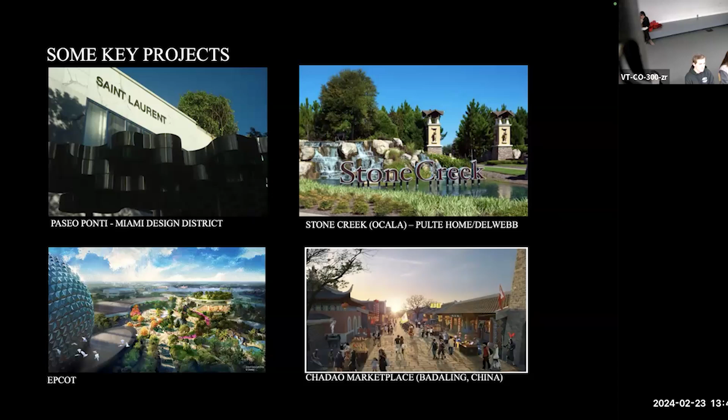All right, so let's do an exercise. I know one person doesn't have her notebook - oh, sorry, I stand corrected, she has her notebook now and a pen. So please take that out and get a blank sheet of paper. And Jen, you were a volunteer. Oh, in Korea, we do this. I need your help.

So we're doing number one. Take out a sheet of paper, take out something to write with. I hope you guys all have something other than blood to write down something. Oh, I need to use my... And I need the volunteer - you were volunteered by the fourth year construction document class. It was you, you were young.

Volunteer will describe the shapes that I'm going to give her. She's not going to show you, she's going to describe the shapes. You can only describe the shapes using terms like large, small, medium, and the placement of it. So you can't say like...

Circle or anything - the shapes and its location on the sheet of paper. The closest to the original will win a prize. I don't have a prize. I don't know, yeah, we can think of something. I mean, I'll take you guys out to dinner, whatever - college students need dinner. Okay, so get your pencil ready.

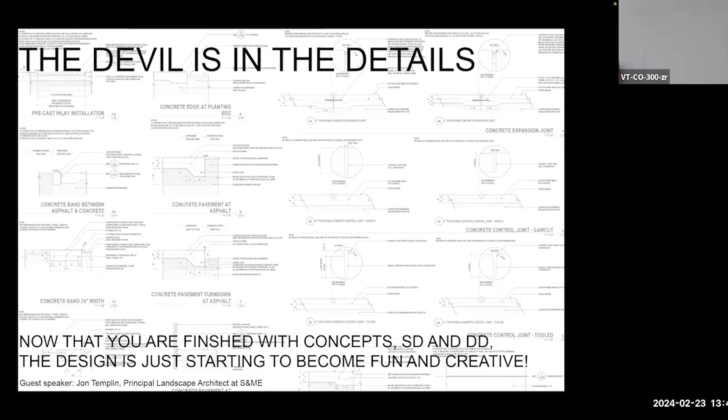Now that you're finished with concepts, SD and DD, the design is just starting to become fun and creative. I just want you guys to understand that everybody may want to do conceptual schematic design, construction detail design, construction administration, field work.

Nobody says project managing, writing proposals, or anything. Who likes to do conceptual schematic design? There's no wrong answer. Anybody like doing construction details? Okay, so our goal is to have you guys enjoy this process, because to me, I think

it's the most creative part of the process. And then construction administration is taking this and making sure it gets built. That's on you guys, to make sure that it is exactly what you guys envision through your construction documents, right?

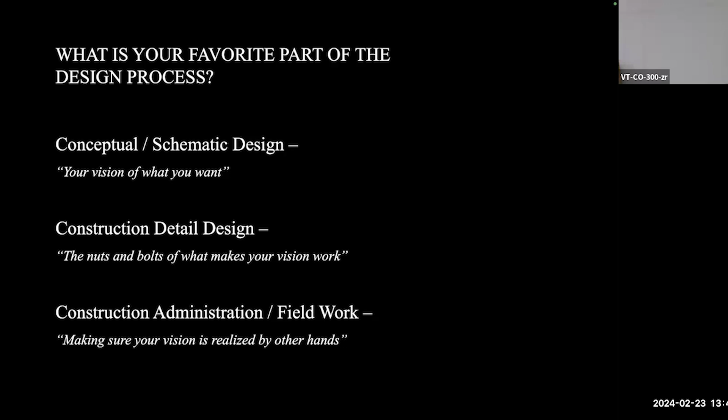So you guys may laugh at some of these. I didn't pull these, I recycled, but you'd be surprised how often this stuff does happen. It could be a matter of just a base being off. It could be a layer being frozen. It could be you got an updated base, but you didn't update it. It can be so many different things where you get that kind of stuff.

Now, they should usually be filtered out through the RFI, request for information, process by the contractor so they can get an answer. Personally, I don't even like getting RFIs. You're going to get them, but I just don't like getting RFIs. I feel like RFIs mean that something is missing in my construction documents.

I hope through this process we will nail everything that you need to know, so that if you do get one, it's not the end of the world. It's a real basic one, like, oh, it's in two plans and it's really four plans. Something very simple. But design-wise, I would really like for you guys to hopefully get out of this

this process that I'm going to teach you today—if you learn this, I think you guys will be a step ahead of a lot of other people. I have people at my office now that have 10 years, and I'm explaining this to someone with 1 to 3 years, and they come in and go, 'Wow, I didn't know that.'

And I said, well, I looked at your documents. I know you, I've seen your documents. I know. So let's get into this.

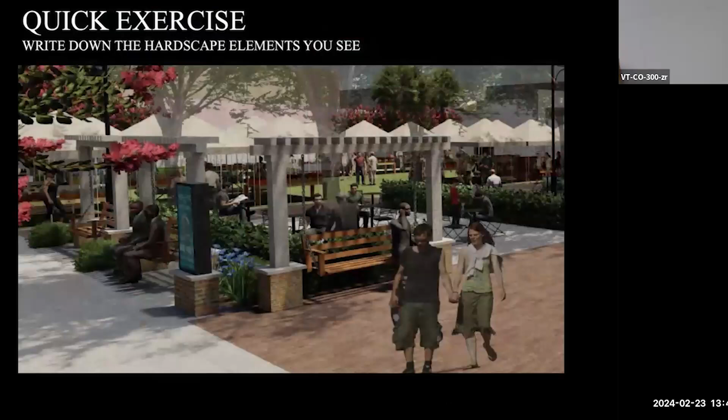So on this sheet of paper, this is a design from a previous firm. You kind of see a plaza here. Just write down a few things that you might see design-wise. I don't care about the landscape, hardscape-wise, what do you see?

Okay, someone want to volunteer? What do you see? Seating. Okay, what kind of seating? Bench seating. Okay, bench seating. All right, sure. What else do you guys see? Paving. Okay, what else?

Turf. I don't know if it's artificial turf or sod or seed or whatever it is. There's a big open space right there for events.

What else do you see? Some type of trellis feature with a column, and that column is repeated onto a digital kiosk. There's a bench there, crushed granite here, so I probably need an edge for crushed granite. There seems to be a sidewalk. I don't know what finish it is, but it looks like there could be a band next to it and some seating up.

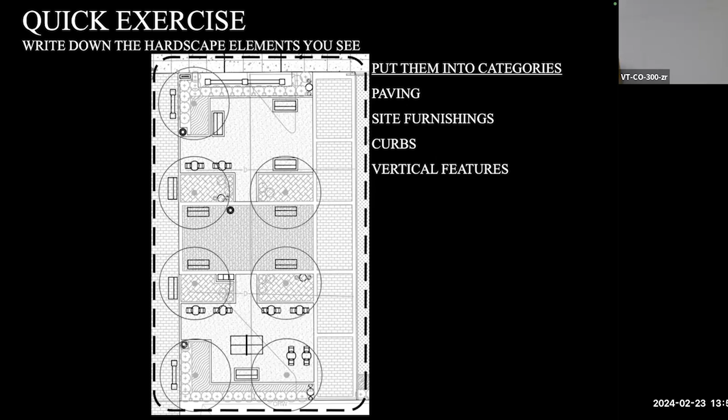So when you're making your list, and hopefully when you guys are drawing this or putting it into CAD, you should be thinking about what you're drawing. They're not just lines. It's either a path, it's a landscape bed, it's something you're being asked to draw from the conceptual master plan, whether you drew it or not. Sometimes you don't get to draw it, but hopefully you do. You should be inventorying everything while you're doing that, because you're going to know best, or you're going to question the person who drew it if it didn't work. That happens quite frequently - it's a scribble, and then when you put it in CAD, it never works. You guys make it work, and that's part of the design process.

So paving types: concrete pavers, clay brick, concrete, crushed aggregate, bench, bike rack, trash receptacle. These are all what would go on my site furnishings list, or any kind of thing that needs a model number or is bought from a catalog. So you guys should go through the SD process and figure out what kind of concrete pavers, what kind of bike rack do they want. You do that during the SD process, right? So it's a bunch of images possibly.

And sketches if you want to figure out something, maybe some details, hand drawn if you can. I try not to go into CAD during SD if I can. I might do the plan in SD in CAD, but for the most part, you're just trying to get the answers as you're moving on.

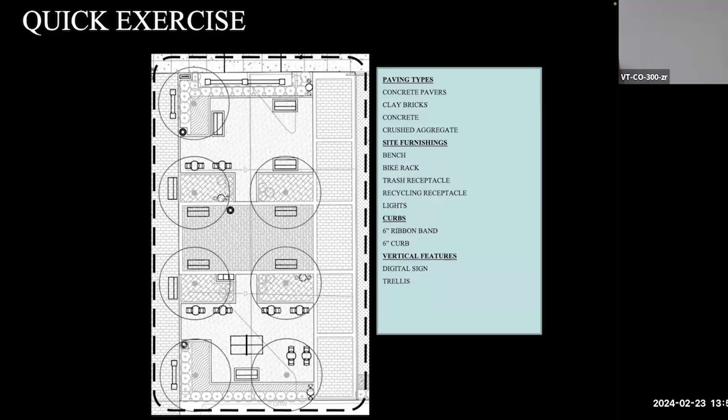So now I start the cartoon set. I got all this stuff here, and now I try to figure out where that goes in my construction document set. Now I call it the cartoon set - people call it storyboarding, you can call it anything you want. I'm just used to it being called cartoon because it's really sketchy and loose.

So at that time, during your concept to SD phase, you're figuring out and sketching out - I can't describe how much sketching, guys, like rough sketch is fine. Just understand your spaces and the relationships between other things. So, you know, it's 7 foot tall, this is chest height, so maybe 4 feet. I'm gonna do stone - Hokie stone, you know, how's that Hokie stone?

Is that on a poured in place wall? Is that on a CMU wall? I don't know, I'm trying to figure that all out. Is there a cap? All that stuff - figure out the relationship. Do these cool sketches, like I said, these are quick. As you're drawing, designing, you should be thinking about this in 3D. You don't need to go into SketchUp. Hopefully you're all 3-dimensional thinkers.

So now look at the plan and sketch a little bit more. So this happens right here, and now I got it in plan. Now I got what this detail is going to look like - still hand drawn, still understanding. It's just the next level.

So I may be at DD now because I'm one step away from getting into construction documents. So DD to me is probably about 30%. Different people do different things - oh, SD is 30%, DD is 60%.

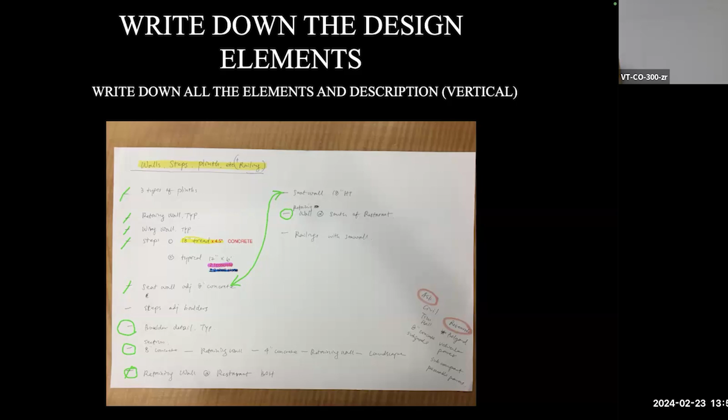Usually what you're going to do is on your finish schedule, you'll have paving types like PO1, PO2, PO3 — the more you know now, the less you have to change later. The problem is when you don't think it out, you've got all your sheets set up and it's like, oh shoot, I forgot this paving. Now all my details are messed up. It's like, oh crap.

Figure out where you need more detail. So I usually go in here and double check myself — I have a section here, a section there. Where are all my sections? Do I have sections that are already in the detail library, or not? If you do, that's great, that's a start, but it's never finished. You should read over it, change what you need to, save it out, and never alter the original.

Get in there and get your inventory of what you have and what you might need to create. So I've gone in here on this plan and said, okay, this section is going to go there. Now I have this many different types of steps — I have a section of every kind of step possible. I have wing walls on the steps too.

So are those wing walls the same? Are they 6 inches above, or all at the same level? Do they have some kind of stone cladding on them, or just a concrete finish? I have no idea.

Figure out when to enlarge. I was telling the group beforehand, this is just for me to figure out the details, so I don't care about scale here — 100 scale, whatever. Once you guys start getting into your plans, they'll probably more likely be at 20 scale. Civil likes to work at 30 scale because they're cheap.

They don't want to use a lot of paper, and they don't like to write, they don't have blow-ups. So if you ever look at a set of civil drawings, you'll think it's horrible compared to what I do. But now you have this — there's a bunch of information here. I'm at 20 scale, now I've got to blow it up, I'm going to 10 scale. Okay.

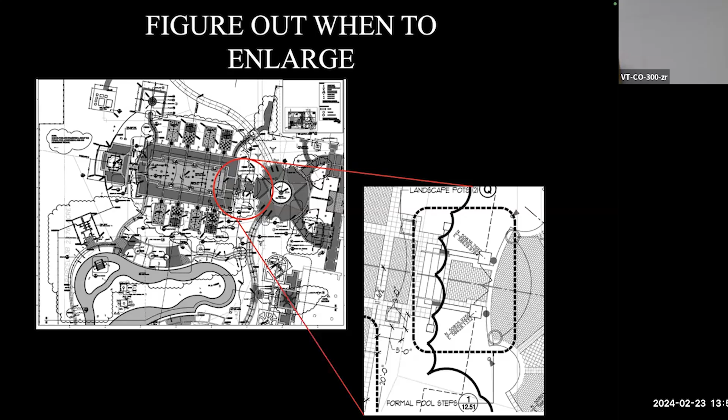This is where you might get into SketchUp. So what are these columns? I'm going to do a camera view here looking down at the pool. Is that column too big? Is the column too small? Is it blocking my view? That's when you start getting into 3D sketching or whatever programs you want to use.

So what I do is, this is the inventory of what I had beforehand. I grab that list that I made in taking notes, and then I go ahead and use Post-it notes. I usually use whatever Post-it note I can find. I try not to use the 1x2s, they're too small, but I'll do a 3x3 or whatever. I start sketching what that detail is and calling what it is and what I need to get out of that detail. You can have text in here, like I need a precast cap.

So now I'm going to take another Post-it note and draw my precast cap. I know I need a precast cap that's this long, this wide, this thick, all that stuff. That's when you get into this. So now I'm covering every single one of those details I just wrote down. I guarantee each one of those details probably has 3 details associated with it, whether it's plan, section, or a cap.

I don't get into footers, but you're going to call out maybe if you have a stone finish, you're going to say, okay, that has a stone finish. So that goes back to the finish schedule. What stone is that? Oh, I wrote it down. I got Hokie stone.

Any questions, guys? There's a lot of stuff being thrown at you. What do you do to refine your list, like you said you could have extra? Yeah, I take a marker, I say, oh crap, and I just write it down. It's loose, and then I make another one of these and I'm done.

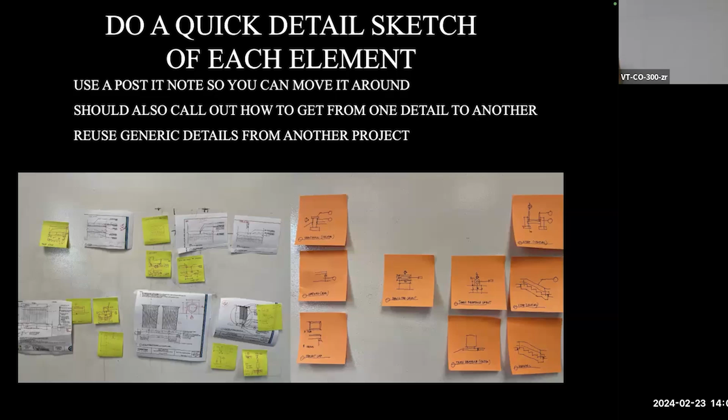This time I'm helping you. So I'd probably say I can spit one out in 4 hours. I can know the whole project in 4 hours. Maybe depending if the coffee shop's busy, whatever, it could take me a day. But I go to a coffee shop, put some headphones in, have it all laid out, and enjoy it, man. It's a fun process.

You'd be surprised how much you learn during that. Now I take those things and I start laying out how do I get to plan and detail to detail.

So I'm at 20 scale on my plan views, and I'm going to 10 scale. First thing I do is I have all my enlargements after my 20 scale plans. I'm going big to small, so 20 to 10.

So you may have a sheet full of tons of 10 scale blowups. You have to make a decision. I've had projects where I've been like, holy crap, I'm 10 scaling everything, why don't I just do 10 scale? And that's fine, it may make more sense and be easier to read, as opposed to having callouts for 10 scale when there's only a teeny spot that's 20 scale.

So I'm in here now, and you should be doing this during that process too. So how do I get there? What is this? Plinth 3, holy cow, I had 5 plinths. My old boss liked plinths, I don't know.

So, on concrete, on 8-inch concrete. So now I go here, and then where's that plinth? Plinth 3 is here. This is how it is.

These things take me, if you're spending more than 5 minutes, then you're spending way too much time. You're gonna be at the coffee shop all night, which is not bad, I'm just saying your boss might not like that. But 3 minutes, 2 minutes, 3 minutes.

Once you start getting used to this and you start understanding, that's why I'm saying this process is fun. It challenges you. Spit them out.

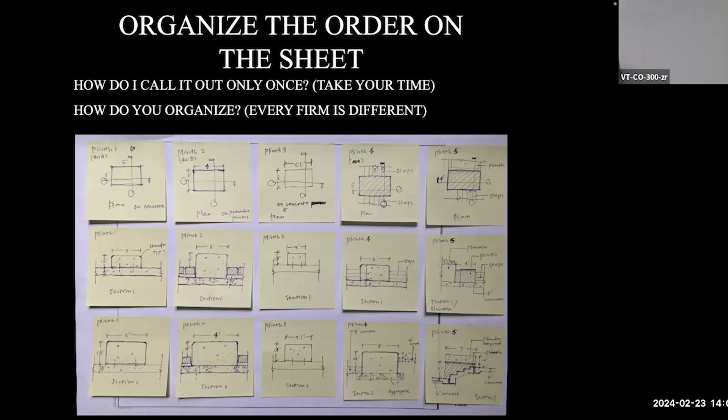People like 22 by 34 because it's true 11 by 17 - yeah, I think I'm right? Yes, so that's a trend. So just write in there, true half size, 11 by 17, blah blah blah.

But this is when you guys can start moving stuff around. And I'm not saying you'll never have extra details, I'm just saying this is a great time to do it, because I have 7 sheets of this with all my post-it notes.

Now if I decide, hey, I don't want to cram or move around another one, there's nothing wrong with having an extra sheet with a couple plinths on there. No big deal.

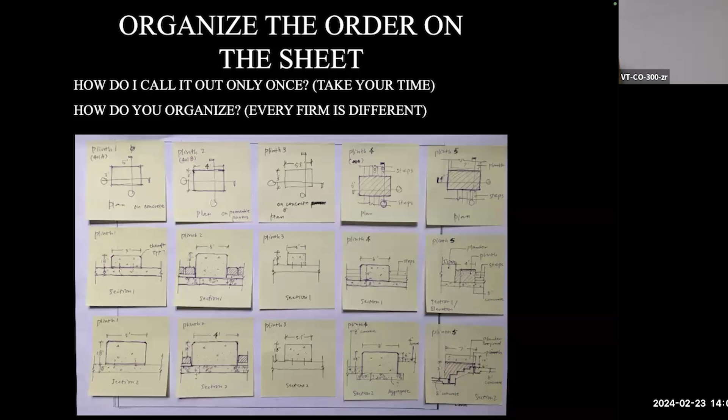Okay, so how to label once. Now I talked about this in some of the classes I was in earlier. So to me, the goal is that on plan sheets, you should label everything once on each plan sheet. And if you have more than one, you could say typical of this many of them, right?

So you're trying to make your construction documents not muddy. I hate it when I've had people put their tags right on the design element. Get a leader out there, get it away from it so it can breathe, right? So I can see it.

So here's my finished schedule, right? I got my 20 scale plan, I got my enlargements, and I got my details that I just put on my post-it notes. Now I'm at this point, so I need to go from 20 - this little callout gets me to this. And now you have to decide, how do I go somewhere else?

And when you go somewhere else, I like to say that you go in a big circle. So somewhere, I'm gonna have to get back to the plan, right?

You can't read this, but it says, see hardscape plan for locations, finishes, and so on. So this will get me back to the plan, I know it's certain. Don't end it, just get them back to the plan somehow, because you're not going to tell them every location where that happens. Go back to the plan, see where it is, it's there, that looks like paving right there. I got it called out on this side, and I say poly, comma, typical. It's a hatch pattern. So this guy gets me to here, I have a section that gets me to here, this gets me, I think that's a rectangular box that gets me back to that.

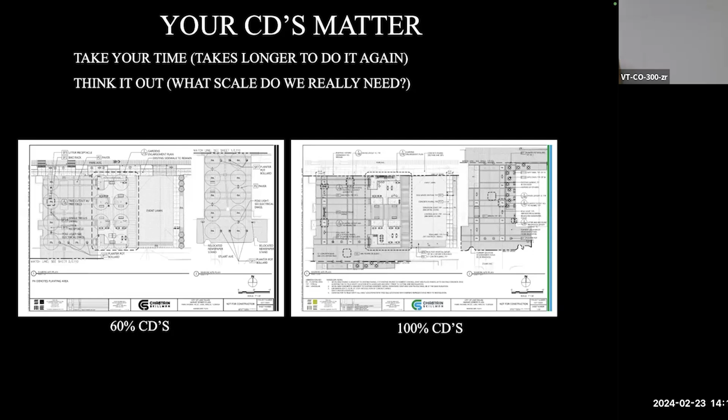So yes, straight lines, I've tried to do straight if I can. If I do an angle, I do it at the same angle. It's not that difficult, do it at the same angle, it looks really good. Easier to read, it just opens up the design a little bit more. Line weights are different, so, okay.

This is what I got. I got details on my plan, have details on the detail sheets. You know what I mean? Like, what the heck, this just looks a lot easier to read. I got them split on either side. I might have to go in the middle sometimes because I don't want to cover up the design. But in general, this looks better than that. If you disagree, then I don't know what to tell you.

You can disagree, that's fine. But get your details on a separate detail sheet. So these are random. It's like, okay, I got an expansion joint, I got a control joint, I got a ribbon curb, I got a thicker ribbon curb. Why aren't they on a set of detail sheets?

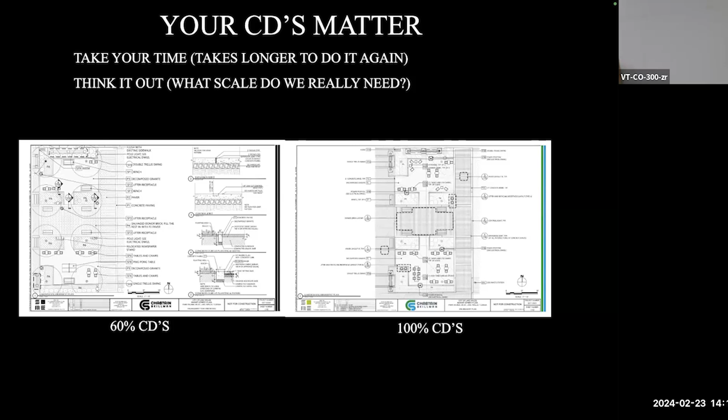This is still part of that 60%. So I'm pulling my hair out. I just got some gray, just no thought. Now we used a manufacturer and they were going to sign and seal the drawings.

So we did design development. Trend these days seems to be that we're going to take it to a design development level, and then we're going to throw it on the contractor.

I try not to do that personally. I like to figure it out and then give the contractor as much information. You can still submit shop drawings to me to be approved by owner's representative, but I'd like to have more control of the design. They did all the design - this is a buddy of mine, he owns a company - but still, I want to have that control.

This is mine, so I have my blow ups. There's two different ways to think about it. Back in the day, we would do high to low and then finish schedule at the end. After I came back from Korea, we started putting finish schedule in the front, and then we would go low and bunch common features together, like the trellis would all be together on a sheet. But I would probably go low.

These are the details that are typically the brainless ones, because I'll just grab those and read over it. Maybe they change a little bit, but essentially these details, that sheet should be done. So I could concentrate on this detail right here - this is the fun one, and whatever. But these usually do need a little bit of work, for the most part the company you go to will probably have these details.

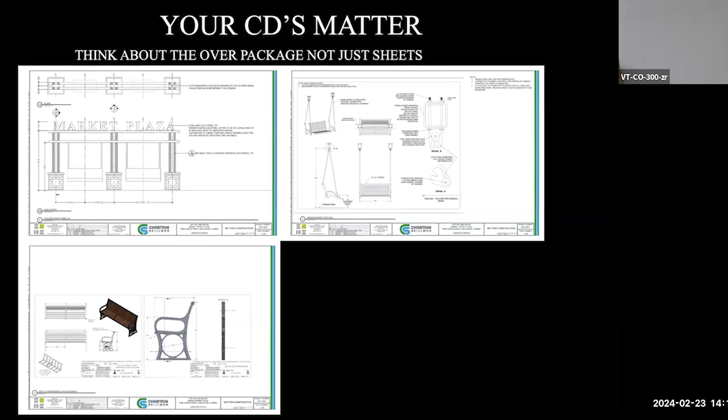Labeling is an art, right? I've kind of already talked about that. Line weights are an art too.

I'll screen back everything. It depends on who you're working with. So if civil is in-house, like GAI has civil in-house, I never touch their base. You never touch anybody's base. But if I have civil as a third-party consultant, I destroy their base.

But you have to know how you destroy it and how you replace it when you get an update. If you start exploding things, just realize I have a very intense process to do that - saving layer states, exporting layer states, bringing in layer states, all that stuff. I'll teach anybody, maybe next time. It's a lengthy process, but I'm guaranteed to have all the line weights and line types there. I usually slam civil down to 50%, might even go 30%, depends.

And then I've been working on these - I have labels for 10 scale, 20 scale. I have a template for all this stuff.

Oh, do not put - this is a pet peeve of mine - nothing goes in paper space. If you put anything in paper space, my brain will explode. The only thing that goes in paper space is the title block and anything associated with it if you need it. Everything else will be in model space.

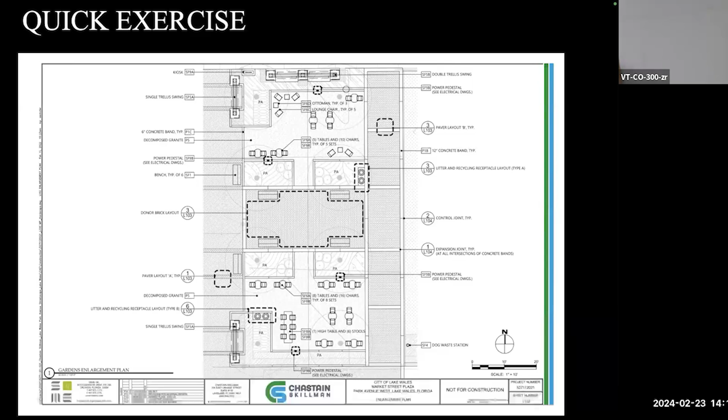So that goes back to text on the right, dimensions on the left, and at the bottom. This here needs its own detail, or you're going to start clouding this detail up too much.

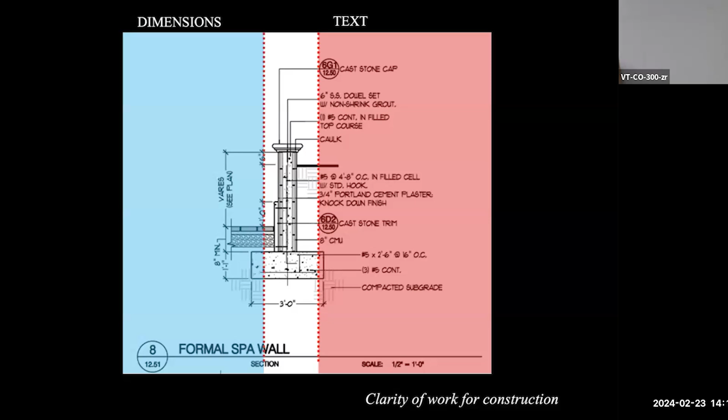Commit to the very end, stay true to your design. This is a project back in the day at Glatting Jackson. I worked on this a little bit - the details for it. That's it built.

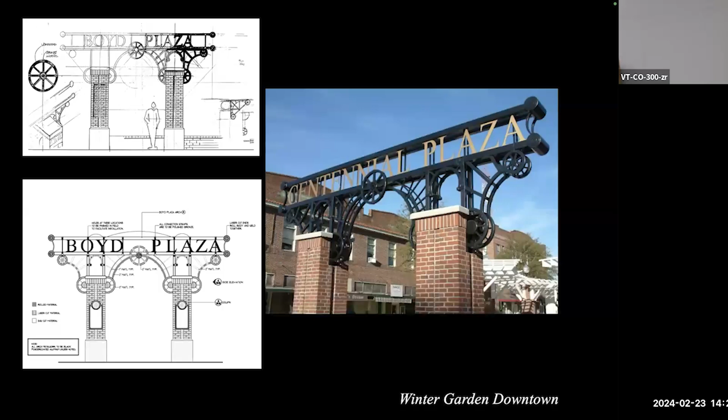Same thing - I think this is a place called Winter Garden, outside of Orlando. I don't remember, but I think so. And I think that's it. Any questions?

No? Terry, any questions? I think people's brains just exploded. Sorry. Well, I'm actually really curious, and I'm asking this of students at this point - how do you think this is important to what you're working on right now?

I think understanding what you're implementing and how it's actually implemented will change how you design. That's part of it for sure.

I'm really speaking about how the layout of your construction documents is really a blueprint, like baking a cake almost. You know what I mean? Things are in a specific order, however you put them in, or however some people go to the extreme where they say irrigation should be the first sheets in your set. Typically it's my last sheet because it's going to go in first, whatever. You don't have to get to that extreme, but it's the process of how you group things together and think about each detail and how it works, which is exciting to me. And I guarantee detailing will get your designs a lot better.

Anybody else want to answer Terry's question? Like at any stage of the design process that you showed - the sticky notes and the quick drawings - as it relates to construction documents, but also concepting and initial detail planning, whatever, at any stage.

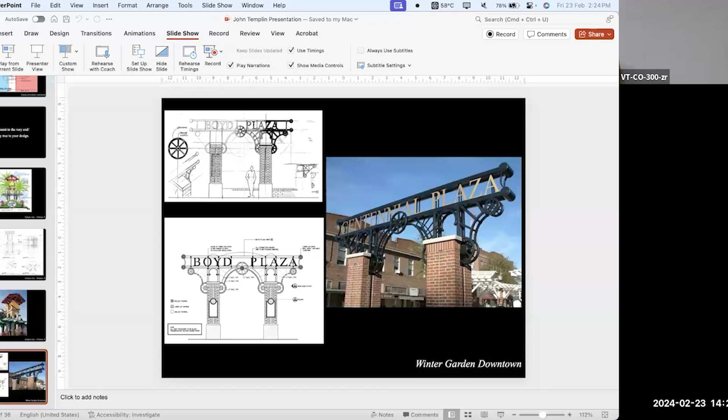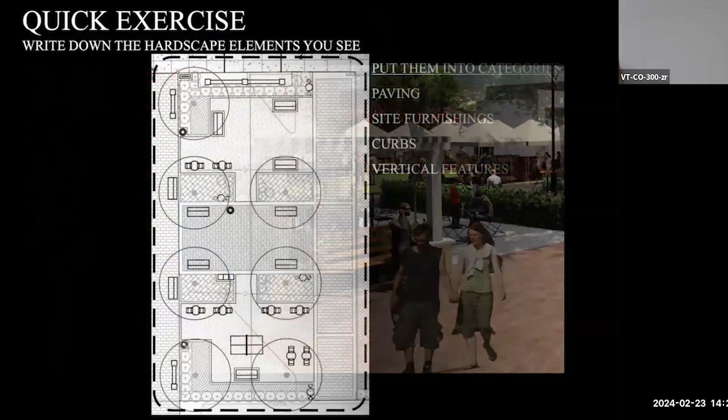So I'll offer this out to the rest of you. The seniors are doing their substantial presentations Monday and Wednesday after break, and you saw their presentations last week—they had master plans with placeholders for the design of things, but very little actual design. The site design is an interesting part. Where your work is, I see on your desks a lot of the master plan, but where is it that you actually do the site design that lets you create these design details? There's a step in between that you really have to get to.

So those are back one. Those drawings right there are what we're not seeing in a lot of the fifth year work right now, which is necessary for what they need to present in just two weeks. This is the fun stuff—you have to know your details, understand the space you're creating and the relationships. But ask anybody, they want to draw this, they want to put this big crab there, that's what they want to do.

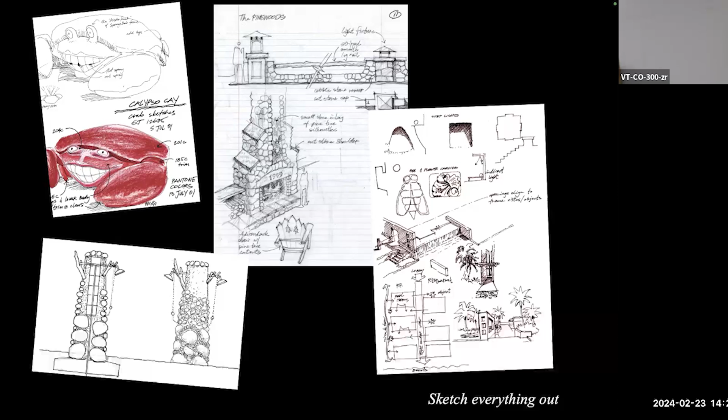That's the creative part—if you ever want to get a theme design, that's what creative is. I don't know if you have to go to this extreme, but this is very helpful in the process, like little vignettes showing where this is happening, a little sketch here to understand that space. We're creating spaces, right? We want people to be in our spaces—if the space doesn't work, no one will ever go. So you've got to get your materials right, get shade right, get relationships right. If it's uncomfortable, you should probably figure that out pretty quickly, and if you have to go to 3D, then go to 3D.

Your client wants to see this because you're selling a plan view to them—they want to see this. If you can do it by hand, that's great. If you have to do it in Revit or some kind of 3-dimensional program, that's fine too. But you still have to understand it to put it in there.

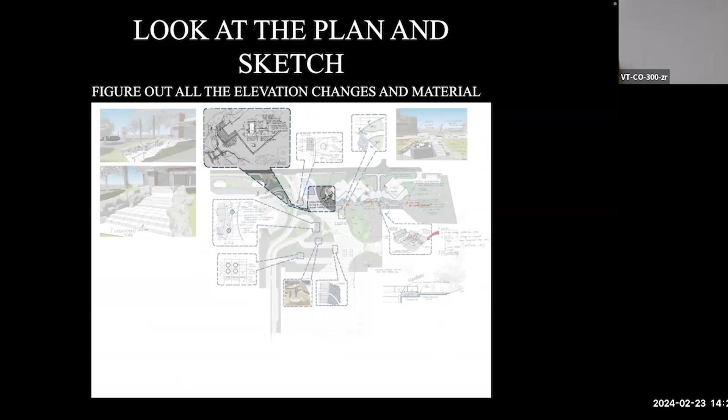But when you try something new or creative, then you need to check the feasibility of construction. In that case, how did you deal with that, especially when you're running out of time to meet the project deadline? Usually I'll have a structural engineer on board, because it depends on how you want to operate. I was just talking about this the other day.

I have not sent a hand sketch to a structural engineer and asked them to put rebar in it in a very long time. I will take this wall here, and if it needs to be doubled, I will start with that detail. I will take my best educated guess on the overlap, the rebar on center, the size of the rebar. I will take my best stab at it. I'll send it to my structural engineer, and now I just saved a lot of money because he's just marking it up, and then I'll make changes, send it back.

You are okay with that? Done. But I will start with the detail that has already—you probably have a detail that has structural stuff in it.

We've also done it where we throw it on the contractor to submit signed and sealed structural engineering drawings. If you're tight on a budget, you can throw it on the contractor. I don't like doing that because I like to figure that stuff out, but you probably have this somewhere in a library or from a different firm you came from. Or you could probably figure this one out.

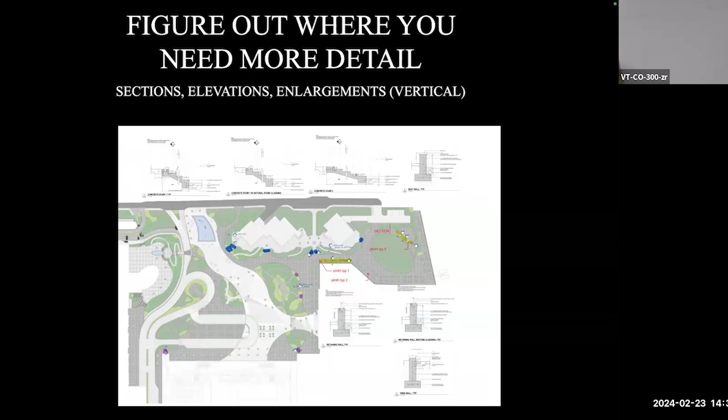I give them this, I control that. You just check it off, tell me it's good, send me an email—got it in writing, you're in trouble. Anybody else? Did you have something?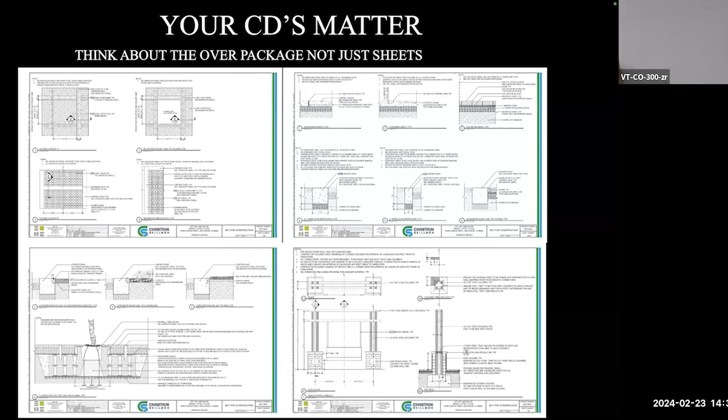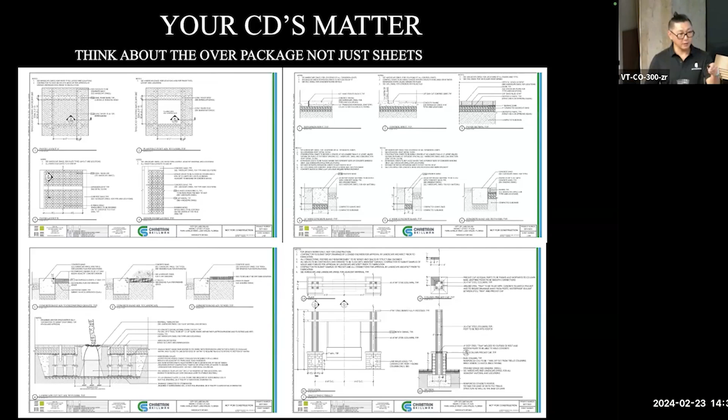When you're thinking about concepts in the design process, do you start detailing right away, as you're sketching? Oh yeah, 100%. If you get good, when you're drawing a line with a pen, you know what you're drawing. You'll draw it correctly and you'll know what you're drawing.

I had somebody come to me with a great portfolio, did a lot of conceptual work in China, master plans, 10 years experience. We were doing a new project down in Clearwater called Imagine Clearwater - you guys can look at that, it's awesome. She was putting some hand sketches into CAD, and it was all just like, what are you doing? The radiuses weren't whole numbers, circles weren't tangent. I could just look at it and go, what is this? And she's presenting and says, oh, I'll do it later, I just want to get something quick.

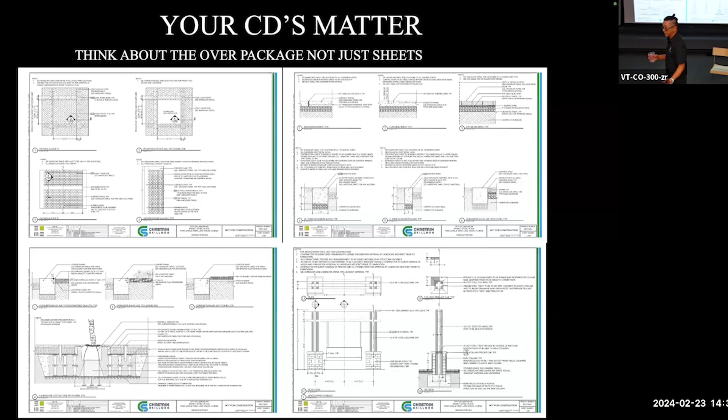Quick takes you no more time. You know what you're doing - it takes no more time to draw a correct thing than an incorrect thing. That's another rule: do it right the first time. It doesn't have to be perfect, but drafting-wise you should do it right the first time. I had a building just the other day - why didn't you put it 5 feet off the sidewalk? Why is it 4.42, an offset? That's do it right the first time.

Best case scenario is you have the concept plan, I pay you to put it in CAD, it gets approved by the client, and now I have to redraw it. I just paid you to draw it - why am I paying again? He loved it, but it's all wrong. So now what am I going to do? Double the time. Just draw it right the first time. Maybe they don't like it - it's okay, not a big deal.

But when you watch me draft, it's like a symphony. I just know what I'm doing, you know what I mean? You guys will get there one day. I used to always say, man, I wish I could just take that piece of your brain and put it into my head so I could draft like that. When you guys get there, you will understand, and you'll be like, dang, I get it now. Like I'm just pumping out CAD and it's all correct and it's just making sense. You guys will get there one day, it's awesome.

You want to get there, you want to. All right, I'm telling you, CAD's math. Can't tell you whatever triangle you were saying or whatever, but I can figure it out. What else, guys? I got a few more minutes or whatever - Terry's gonna kick me out soon.

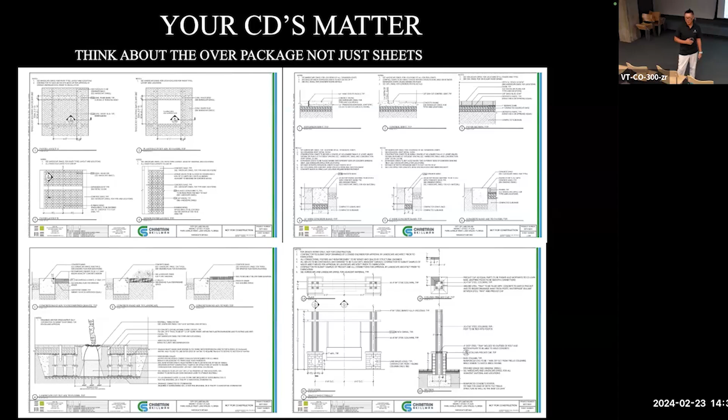Were there designs in Korea that weren't as popular in America that you brought back? So I was laid off in 2009. Experience is subjective - I graduated in 1999, so I feel like I have 25, 26 years experience, but only 20 on paper. It goes back to the passion. I'm walking around Korea going, man, there's no handrails or nothing - how do they get away with this stuff? Where's the Korean ADA? This is like 1970s style, fountains with over a 30-inch drop and no handrails. 5%, what is that? There's no handicapped people anymore in Korea - I mean, they're in the subway with no legs on a skateboard. There's really nobody.

But I think my biggest takeaway is that the Korean design and spaces were way cooler than I thought. It was kind of like designing for Legoland. If you ever design with Legoland, like I said before, you won't have a lot of control over that - I gave them designs, yeah. But what's cool about Legoland is that any design you give them or they come up with, this is their priority.

And I'm like, oh, that's cool. I never thought about that because I'm never thinking about my kid enjoying everything being kid-sized. You know, like that's their thing - hey, where's the kid door?

Korea's kind of that way to me - Korea was kind of just free in their design, like the Cheonggyecheon Canal is awesome. That was probably just finished right about the time I went over there. I think it was done in 2008, I got there in 2009, and that was the first project I saw. I mean, the ecosystem in the middle of a city that used to be a bisected, super highway - that's awesome. How many people enjoy that? But there's no handrails, they just got brick. I don't get it. So I think the freedom of Korea was pretty cool.

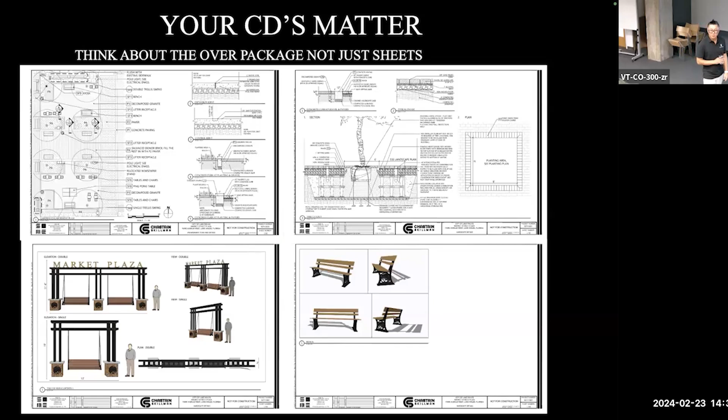But I'll tell you this: if you guys understand this, no one's ever going to tell you this sucks or they can't understand this. This is what I do. But I'll tell you, the alternative is I go into interviews and say, show me a set of your construction documents. That's what I say, you guys can't say that. What I usually do is have them bring me a set of their construction documents and I decide if I want to work with them. I've butchered some clients before just trying to get a job - or you want to know what I really did? I didn't get the job, but it was fun.

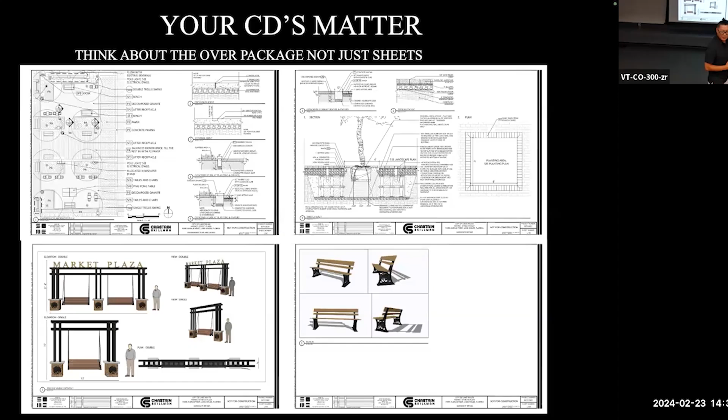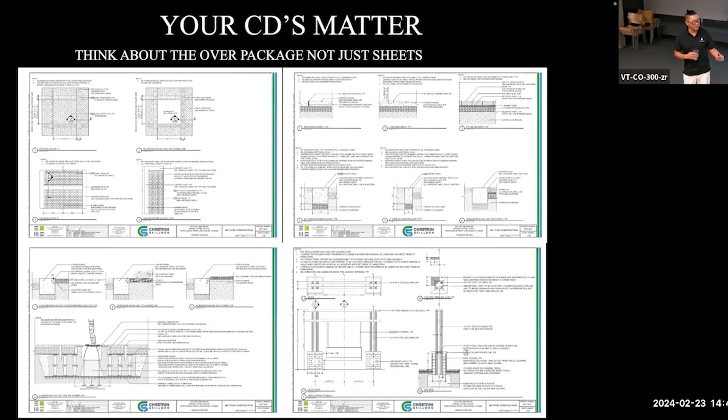But this thinking and this level of detail - I guarantee you, if you could start mastering it and getting it to a level that's quick and efficient, just like doing 3 concepts, you're gonna excel so high and you'll never have to ask for a raise. You may not want to do this, but if you can do it efficiently, you'll start understanding this is kind of fun. It's a puzzle, right? You're making the kit of parts to put together the concept you made. When you guys get to that level, if you do it all, you're worth so much money as a designer or landscape architect. I guarantee you that - get your landscape tags correctly and it'll look great.

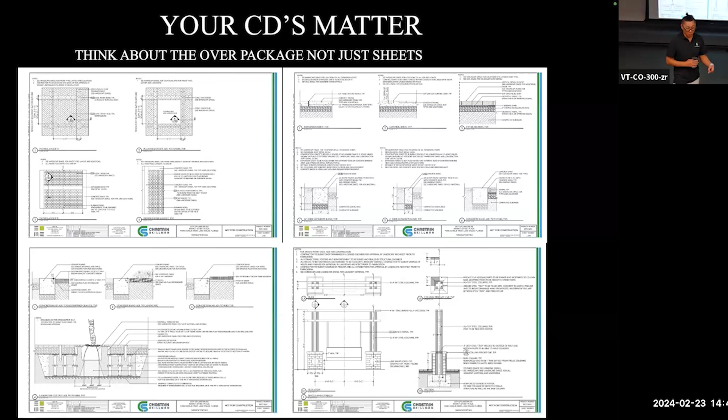Yeah, I got to Disney Springs, I tagged my thing, like I'm done. My boss was just like, everyone come over here and look at this. Yeah, look at that - and he said, this is how we should be doing it. And I swear to you, it didn't happen because they didn't care. I can go to my Disney Springs construction documents and know when a particular person who's running land design touched my detail, because it was just fast, he gotta go fast. I can tell you where it is because it's not lined up on the right side, dimensions are everywhere. I can say you touched my detail and messed it up - that's my style. Every style, you can make a style out of this. Maybe you do something cooler than this. Always hand draw though - this should all be hand drawn. Guys, start hand drawing, go straight to pen.